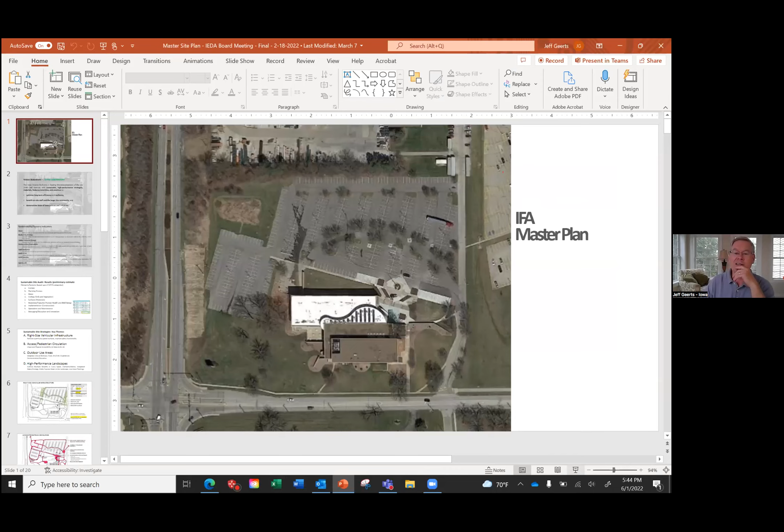And for the topic of the evening, our office for the Iowa Economic Development Authority is located in Des Moines. I'm going to share my screen now and give you an idea where we're at. This is at the corner of Bell Avenue and Fleur Drive. Gray's Lake is right up here to the north of us. This is Communications Data Services, or CDS, in the Bell Avenue Business Center just to the east. And across the corner here is the old ABI campus.

So this building, this property was purchased by the Iowa Finance Authority, I believe in 2019. So the Iowa Finance Authority is another quasi-state agency, and it's a sister agency of the Iowa Economic Development Authority. We both share Debi Durham as our director, and we both work a lot with community development types of programs, particularly federally funded programs like the State Revolving Fund and the Community Development Block Grant Program.

We also house the Iowa Insurance Division in that building also. So there's 3 agencies that reside in this complex now, and the total area is about 10 acres. And as you can see, as it sits right now, we have a pretty massive amount of parking and impermeable surfaces and a lot of turf, and a really hard to manage, very steep slope along Fleur Drive.

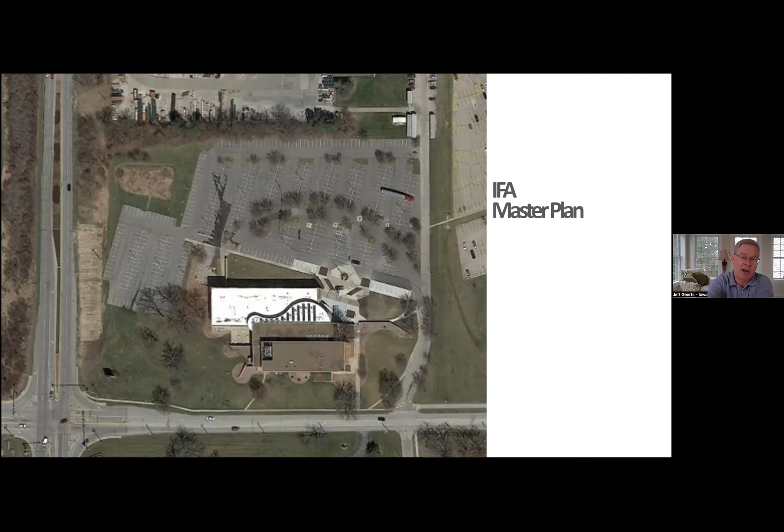So back in November, we were able to secure some financial support and partnerships with Polk County through the RAIN campaign and through the Department of Natural Resources and their non-point source or the 319 water program there, who really were interested in this concept of developing this living laboratory to showcase best practices for redeveloping an existing urban, developed site. How can we transform a site that's already been developed in an urban location and improve its overall environmental performance?

So, we are looking at how do we improve the resiliency of our site? How do we make it more efficient to operate and maintain? How do we use the site to help us in retaining and attracting staff to our agencies, as you probably hear every day? That seems to be a challenge for many people. So how can we turn that site into an amenity that can help us support the current staff and retain them and attract others in the future, and demonstrate some of our policies and initiatives?

As we started this planning process, we did get some consulting assistance. We hired BNIM out of their Des Moines office. Kevin Nordmeyer led the team and partnered with a gentleman named David Yocca, who is a living infrastructure, ecology restoration expert and landscape architect fellow. So we had a really great team between Kevin and David.

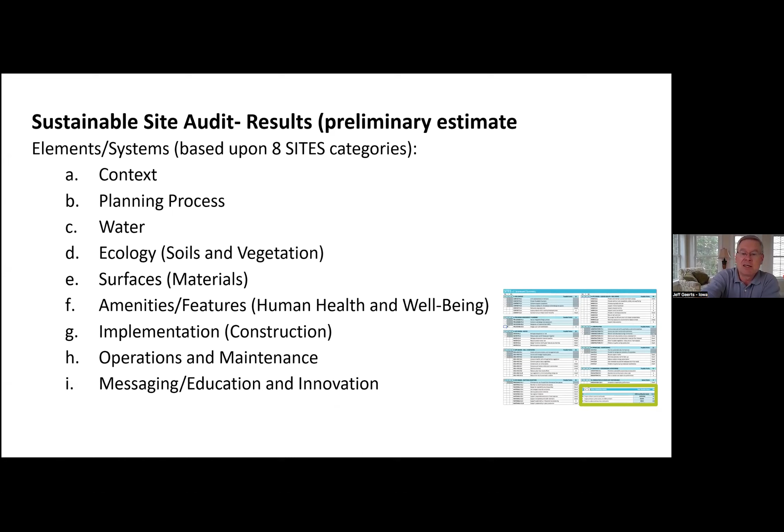And as we started meeting, we developed this plan over about a 2-month period. We had about 36 people involved, and it was very interesting. About half of those 36 were Iowa Finance Authority and Iowa Economic Development Authority employees. But we also brought in the stormwater team from the city of Des Moines. We brought in Jeremy on the sustainability side. We brought in the Parks Department. We brought in community development, planning.

We brought in Polk County and the Soil Water Conservation District, Drake University, Knapp Properties, Knapp Property Management, who manages our property, RJ Lawn and Landscape, who's our site contractor who maintains the outdoor portion of the site. The Iowa Stormwater Education Partnership was also involved. I think I mentioned Drake University as well, but we had almost equal outside expertise combined with members from within our two agencies. And in that process, we narrowed it down and developed these key themes.

How do we right size the infrastructure we currently have in place? And I'll talk more about the parking and the parking lot size here in a little bit. How do we create greater opportunities for outdoor uses on the site? How do we make better the access and the pedestrian circulation around the site? Again, encouraging more outdoor use of the site and connections to the neighborhood. And then also, how do we make our landscapes higher performing? And I'll go through each of these little pieces here.

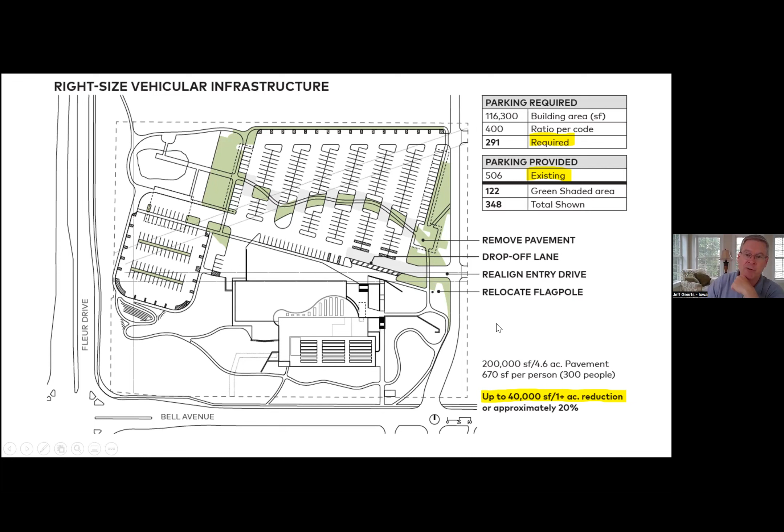We also proposed taking out some parking in here to create a little outdoor green space that you'll see in some future photos, and kind of change the circle drop-off area to just a drop-off lane. And then looked at removing some parking over here too, which I'll show you. And eventually, even with just those minor changes, we showed that we could reduce our 4.6 acres of pavement by almost an acre, or 20% of the imperviousness that we currently have.

And by doing that, it also helps create some opportunities to create these little pedestrian loops and walking paths around the site that when it added up, I think we're just a little over 3/4 of a mile if you made all of the loops. So we would be taking out the parking over here, creating a kind of a grassy swale, or we would call it a bioswale.

Yeah, somebody have a question or comment? Okay.

And part of that, next to that bioswale, that would be managing the water that's running off this parking lot before it gets over to this feature I'll show in a little bit. We'd add a little walking path as well. So we tried to create better pedestrian circulation around here. Look at some ways to improve the crossings at Fleur Drive and Bell Avenue. Improve our bus shelter, which right now does not exist. Right now it's a signpost stuck in, looks like a tire rim.

Again, just trying to make it much more attractive to use other modes of transportation, adding additional bike parking, making it closer to the front door and more accessible. We do have some indoor bike parking right now, but you have to go up a series of steps and across a loading dock and unlock 2 doors to get to it. So we're trying to make it more accessible.

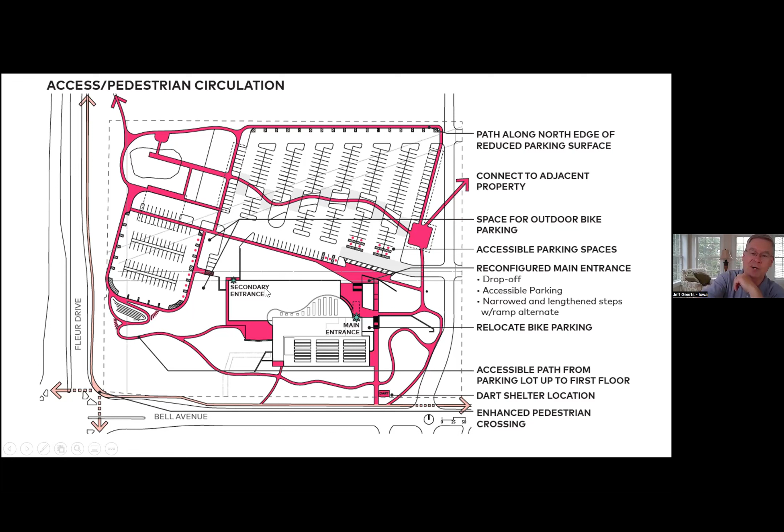Looking at the outdoor use areas, again, not only from just getting out and walking, but can we move more of our meetings outdoors, whether internal or external meetings? Can we do some sort of educational programming out there? Can we create other types of work environments that help retain and attract employees, help with social distancing interests, provide safe places to gather?

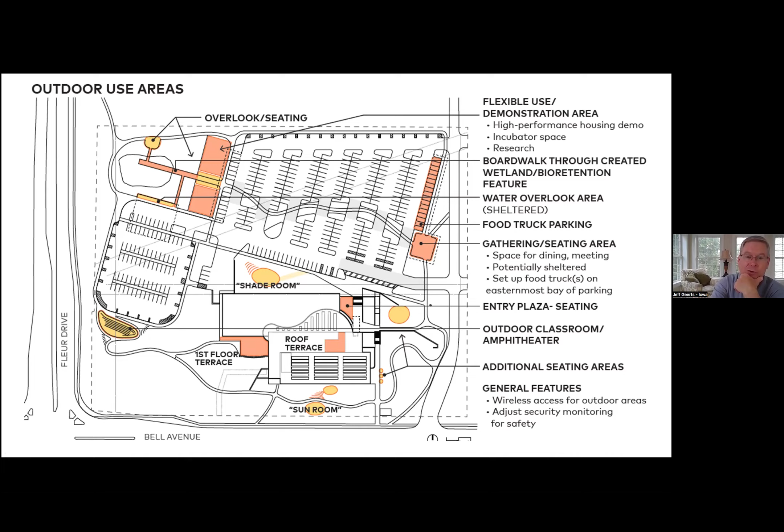What you see here is we took out the parking that was along here, and you'll see in a future image, this becomes a parking canopy with solar. That could be a place where we park food trucks in the future and charge them or power them with the solar versus the diesel generators that a lot of them use now. And right now, those trucks sit in our circle drive at the front door. So again, just trying to create a greater outdoor, more amenable space for working and play as well.

And then we also started looking at the stormwater side of things and what are the opportunities to create demonstration sites of different types of stormwater best practices. Right now, almost all of our stormwater is going into inlets in the parking lot or roof drains into storm sewer that is going to a detention basin here that's in really bad shape and very much silted in, probably with at least 1.5 feet of silt, if not more, over the last 60 years.

We have a little bit that goes off east into a storm sewer pipe here that goes out eventually, I'm going to assume goes to Gray's Lake, although there is a little drainage ditch between us and Gray's Lake, so it may actually funnel its way over to the Raccoon River. So we started looking at how can we divide and conquer that stormwater and demonstrate lots of different practices.

So we are showing here some proposals for incorporating permeable pavements, some opportunities for incorporating bioretention, which is basically rain gardens with a subdrain underneath them in case of a large rain event or the system gets clogged or for whatever reason isn't draining. Converting our raised parking islands into rain gardens as well. That bioswale that I already mentioned would be an addition where the parking spaces were at the north side.

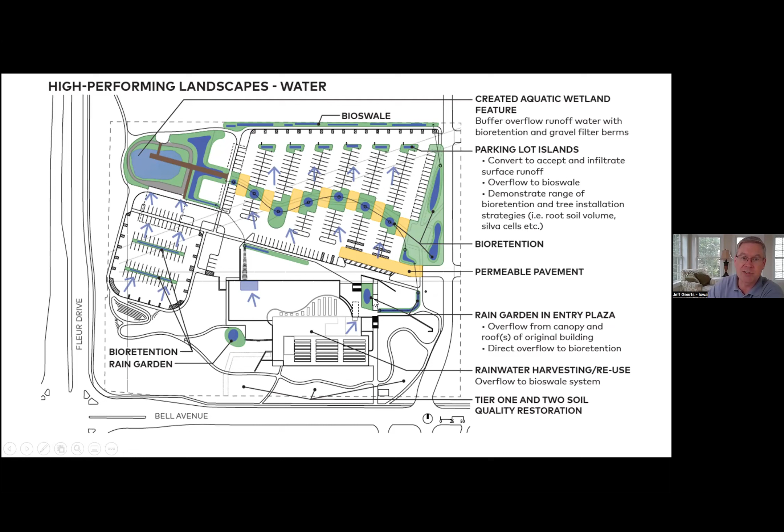Converting this detention basin into a stormwater wetland. I'll have a couple more images of that, kind of creating a little boardwalk feature within it. We look at some rainwater harvesting opportunities off of the upper roof that maybe feeds some little garden plots on the roof here, or at least green roof applications as well. And then I showed you already that little rain garden area, the entry plaza, as you come up to the front door.

Kind of building off that idea of high performing landscapes in addition to the stormwater management, really looking at the plant ecology on the site and really getting a lot more trees in there. Right now, unfortunately, if you go past our site, there are very few trees in the entire parking lot. We lost about 24 trees to the emerald ash borer, and they've come out, but nothing has gone back in yet.

We also have a couple acres at least of mowed turf right now. That takes 2.5 to 3 hours a week that RJ Lawn Landscapers are mowing those and mowing the current parking islands. So there are some proposals in our plan to convert some to pollinator gardens. I would kind of view it all as pollinator gardens because we're talking about converting turf areas to restored prairie.

We've already started that. We've already started prairie restoration on the south side of the building this spring. If you go by now, you'll see kind of an area that's been killed off and has some good plants and some not so good plants coming up. And then we also have it flagged out and are getting ready to take out about another, I think, 1/3 of an acre yet this year.

Oops. Oh, I didn't know I could do that right in that space. This will also become prairie here over the next couple of years, and eventually we'll move over to here as well. And then we want to do the same thing along Fleur Drive. And hopefully we'll do that in tandem with the state's integrated roadside vegetation management program. But before we can do that, the city of Des Moines needs to adopt an integrated roadside vegetation management plan with DOT, which I think they're going to work on over the next year.

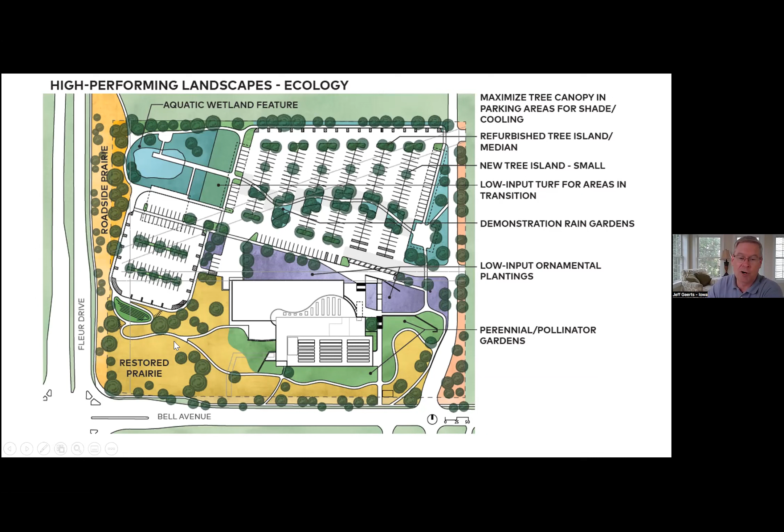Let's see what else can I show you. So adding some additional tree islands in here, but just a lot of trying to get more shade, more tree cover onto the site, and less turf and more natives onto the site as well. And then we also looked at our rooftops. We kind of have an interesting opportunity with our rooftops here. We have 4 rooftops: second, third, and fourth floor, then the upper floor.

This space up here actually has kind of a break room. And then most of it is the mechanical systems, but that break room actually has a rooftop patio access up here on the third floor. So we have opportunities to do maybe demonstrations of 3 different types of green roof systems, one on this roof, one on this roof, and one on this roof, and leave this roof as kind of a control comparison roof. And this fourth roof is also showing the potential for a solar array installation to show the benefits of installing solar over a cooler green roof than over a hot roof. So,

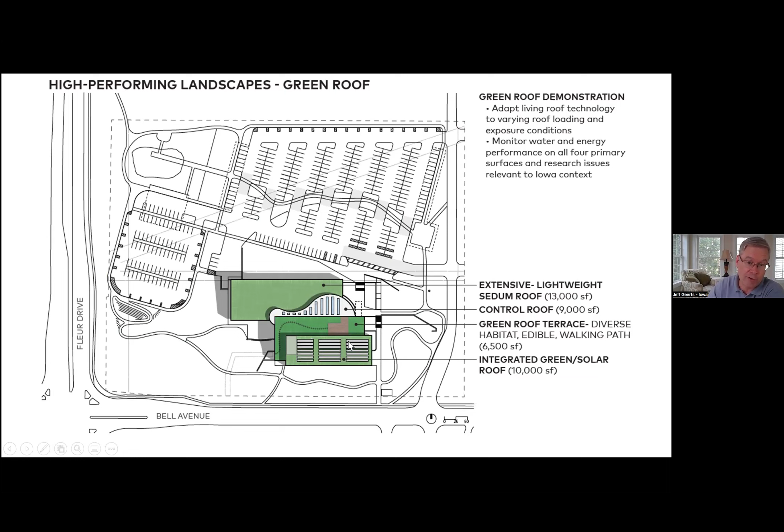and then speaking of solar, we also identified some other opportunities to incorporate solar into the site. And we could also do solar on these other roofs too, but for the purposes of the plan, what was suggested is solar on the upper roof over a green vegetated roof, a solar canopy over here that shades this row of parking and creates kind of a shaded outdoor space that all becomes green space. In the original area I showed, there's actually parking right there too, and there's also parking over here as well. We also propose a solar canopy over here and one over here as well, with this potentially being kind of a little overlook area too for this stormwater wetland.

And either this area or this area potentially being places we could park the state vehicles. Right now they're over here, they're unsheltered. And as more vehicles go to electric, you know, having the opportunity to charge those electric vehicles there, and there. Right now we have a charging station in front of the building here for 2 vehicles, but we know we're going to need more than that very soon.

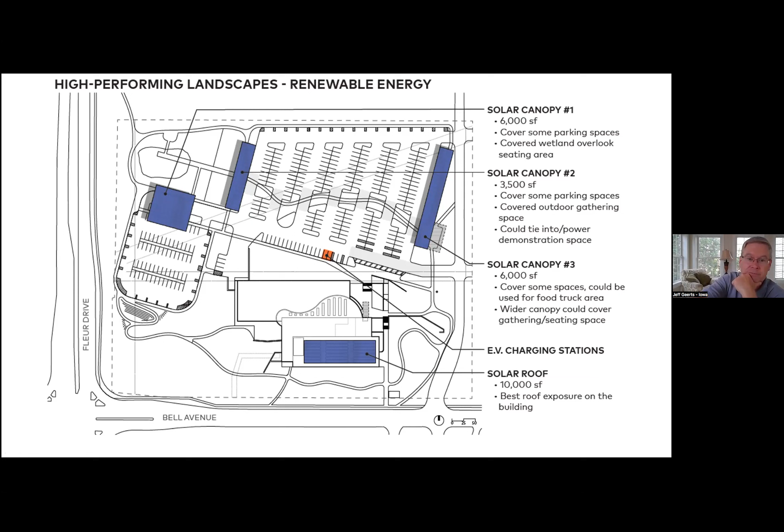Map Properties is currently out getting bids from contractors or engineers and design firms to redesign the front entrance piece of it. So hopefully you'll see a lot going on with the native vegetation this year, and then probably this front entrance being reconfigured next year. And then if the city has their integrated roadside vegetation management plan on file with DOT within a year from now, we probably will go to the Iowa DOT with an application for some funding, hopefully to tackle this piece along Fleur Drive.

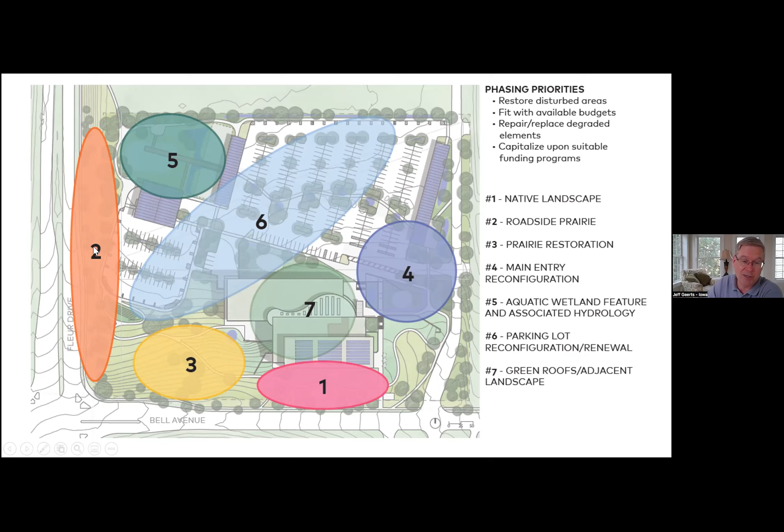It's so steep right now, you can't maintain it. I've walked up it. You basically have to walk on all 4s to get up there. So it's really hard to maintain. And we would really want to convert it to something that's easier, long-term, lower maintenance, and more attractive. So that's kind of a phase-in plan.

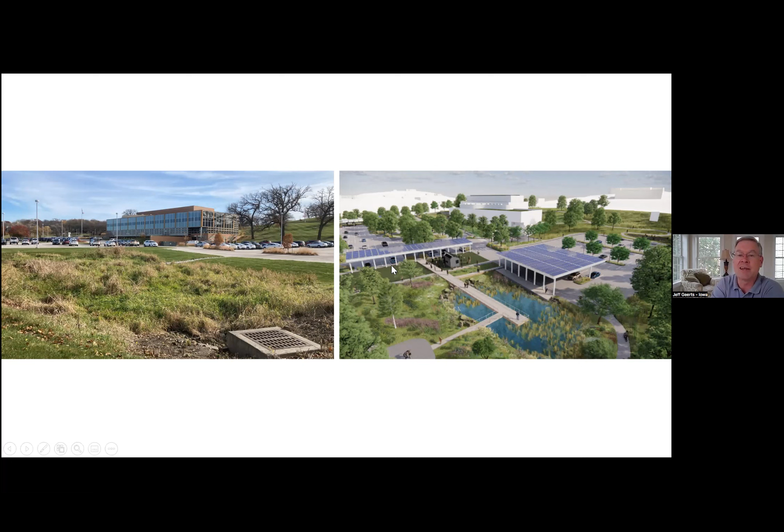So eventually you get to something that looks more like that. Or here's an image from the southwest at the base of the hill along Fleur Drive, looking over our not so attractive detention basin and our parking lot and existing building as it currently is. And this would be the vision if we implemented the concepts as shown that I just shared with you.

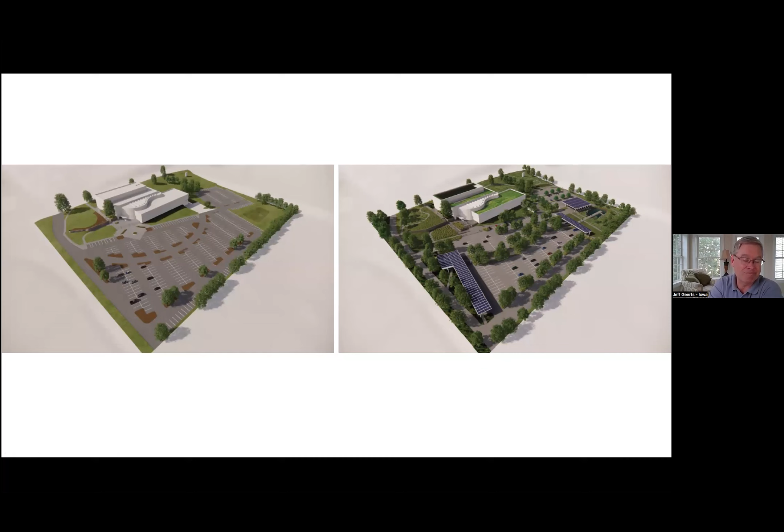So it'd be going from something that looks like this today to hopefully looking like this, and really demonstrating all those things we just talked about: the habitat restoration, the native plantings, the stormwater management, the alternative energy, reduction of impervious surfaces, creating more outdoor gatherings, working spaces, just getting more interaction with the site itself, reducing the heat island effect, all those kind of good things that we're trying to achieve.

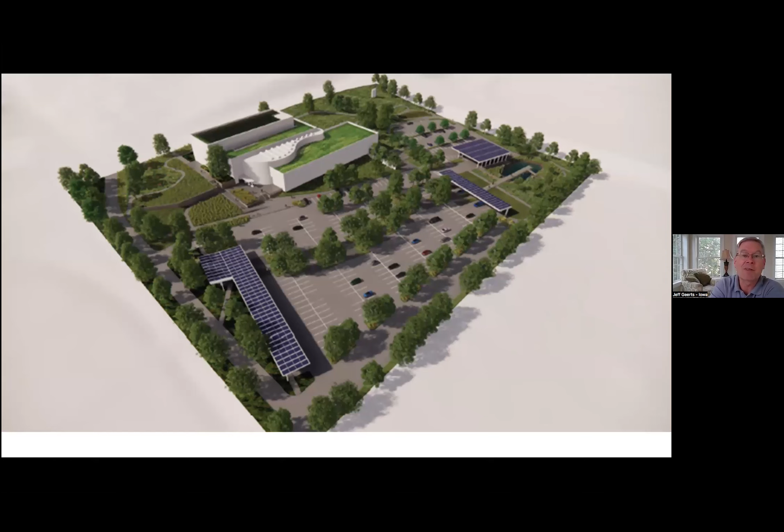So there's one more, a little more close up of the vision. So we're basically trying to go from what you see on the left to that. And I've got a couple slides in here, just kind of fun things that I might as well show since I know they're in here. There's a group of universities led by Georgia Tech, I believe, that has been developing reuse opportunities for spent wind turbine blades. If you Google Re-Wind, I think it's the Re-Wind design catalog, you can see the various designs they've come up with for very specific types of wind turbine blades of varying sizes.

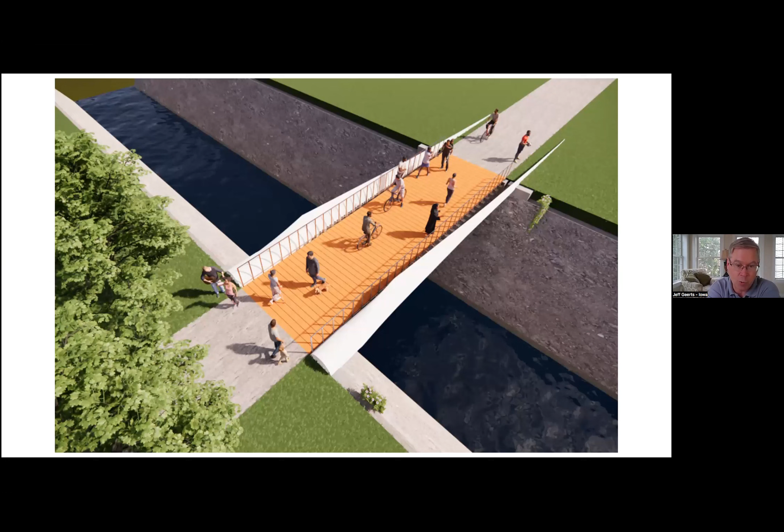And over here, in what would become a stormwater wetland feature, we were showing examples of little boardwalks or bridges into the wetland itself. And that's where you could see maybe something like this being a use of some old wind turbines in Iowa that are no longer being utilized for whatever reason. So that's what I have. We can go back to some of those if anybody's got questions or comments or thoughts.

I have a question. I'm on the stormwater mitigation, flood mitigation committee for the city. And the city, of course, is putting way over 100 million into gray infrastructure, and also doing a good job of trying to figure out green infrastructure. Just wondering if you have any research on the percent of flood mitigation that doesn't go down into the sewer or the retention basin, how effective, because Philadelphia, their city plan is mainly green infrastructure.

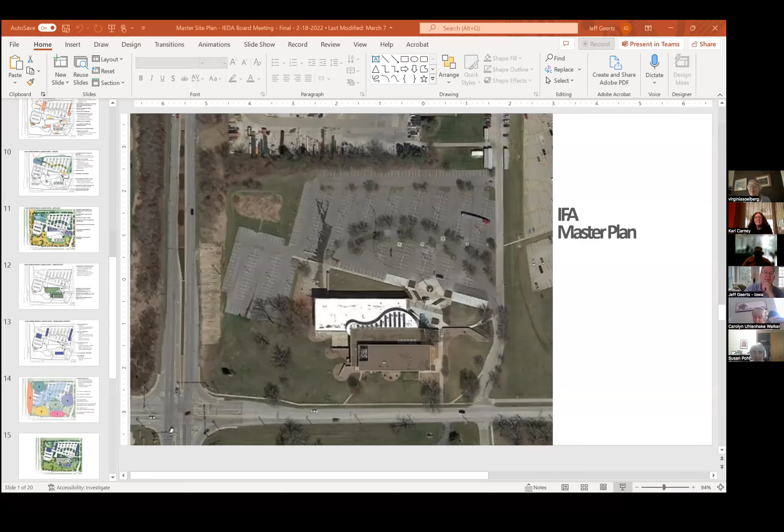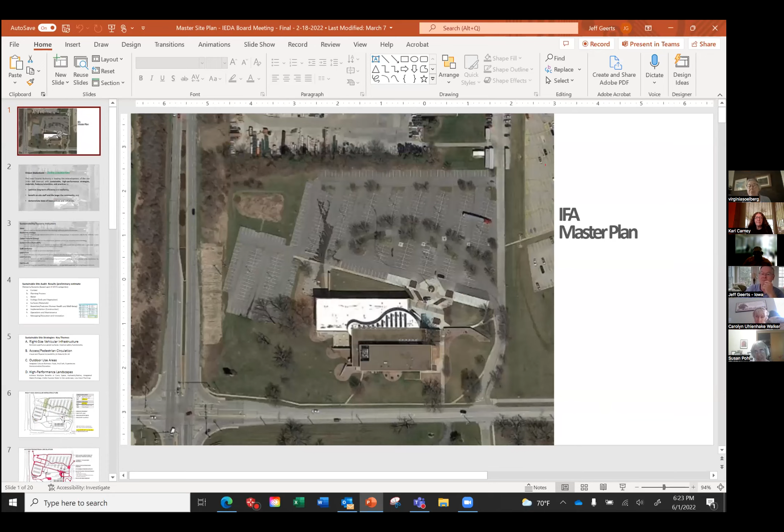I think I'll add, our public works director last week, when we were talking about the opportunity to do that vegetation management plan for that area of the site, also mentioned that they did do a tree inventory and only identified really one tree in that area that they think is one that we need to be concerned about. Yeah, it's probably somewhere in here. There's more trees along here, but our property ends about right there.

And then this is our property line, our north property line is right behind this curb, just a couple of feet, runs across here. And then it's city right-of-way, kind of on the upper part of the slope and all of the slope down here. And then our neighbor has this piece of it. But maybe I misunderstood you, Ginger. Our detention basin, or what we're showing as the stormwater wetland, in this image right now, it looks like this.

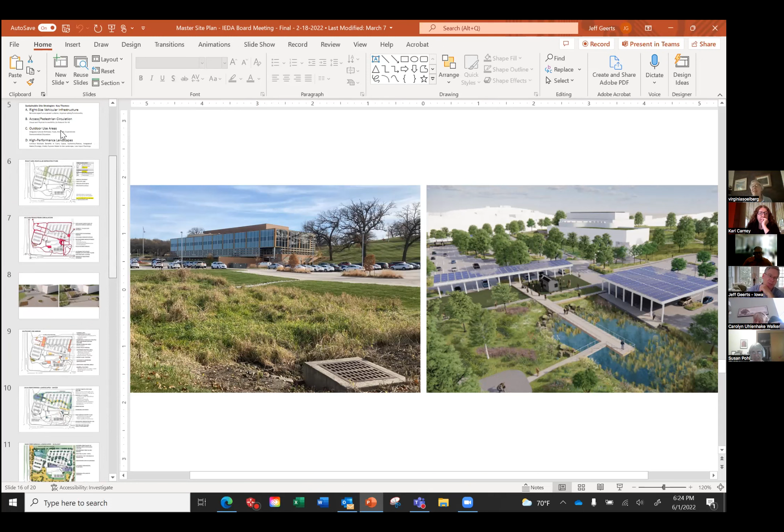Yeah. Now, I wasn't speaking about your project as much as I have seen it locally in other places where they're doing that. Yeah. Well, in some cases, yeah, that was something I've learned over the years too. That always surprised me because I always thought having the trees along the stream corridors was a good thing, but apparently in some cases not a good thing, and they contribute to stream bank erosion and so forth.

So in a lot of the stream bank stabilization work that happens, they seem to remove the trees to try to get a better ratio of slope to protect that stream bank and even create little flood benches for flooding and kind of reconnect in some cases to the floodway. But there are some other cases where trees go, and I'm very, very upset and sad to see that happen. I probably know what I'm talking about.

I'm wondering, you showed the slide that talked about kind of how the project was being phased in. Do you have an estimate of when you're expecting all the different pieces to be completed? And then B, is there any concern? It seems like a lot of times projects propose green roofs, and the green roofs are always the last thing to be completed, and they're always the first thing to get cut because of budget cuts. So wondering if there's any concern for that.

Always. It seems like the green roof projects that get proposed, and many of the projects we fund outside our agency, seem to be one of the first things to go because they are an expensive upfront cost. Although in the right situations, they can provide some energy efficiency benefits to a building. They obviously provide stormwater benefits, and they also can make the roof last longer.

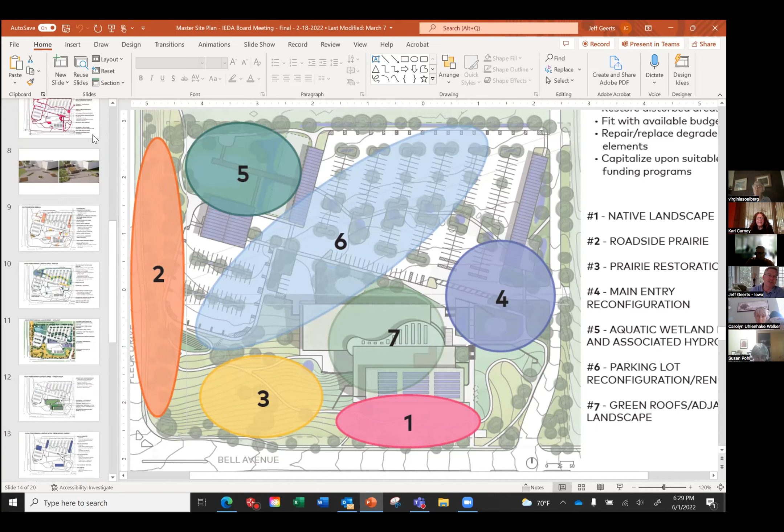So timeframe, I don't know, I'll say 10 years, but I hope it's less than that. The other thing to keep in mind here is that just to the east of us, it's partly showing on here, the Bell Avenue Business Center is now owned by Kraus or Kraus Group or Kraus Plus, part of the Kraus family. So they've got those, whatever it is, like 40 acres over here. And in the south of Grays Lake Masterplan, there's lots of redevelopment shown here too. So there may be some opportunities as that redevelopment happens that we can kind of partner together. There's redevelopment shown north of us as well.

So maybe there's a way to collaborate and partner all of that stuff, and maybe economies of scale could help us do some things that maybe we wouldn't be able to do, or maybe do them more quickly. But I think this redevelopment's probably at least 10 years down the road too, probably after the soccer stadium district or whatever it's called gets tackled first. Jeff, as a living lab, will this be shown to developers, to corporations, to big business, as well as, of course, city staff, just to show what can be done?

No, definitely. That was our whole idea and our pitch to Department of Natural Resources and why they helped fund the development of this plan. We envision site tours, field days as things are being constructed and as they're installed, having some sort of informative website, having signage around the site explaining to people what they're seeing. You could have little classes there. We've actually developed a couple of large meeting rooms in here, so we could envision working with the Iowa Stormwater Education Partnership and doing classes and maybe even hands-on installation types of trainings with different practices on the site, training some of our staff as docents to lead tours.

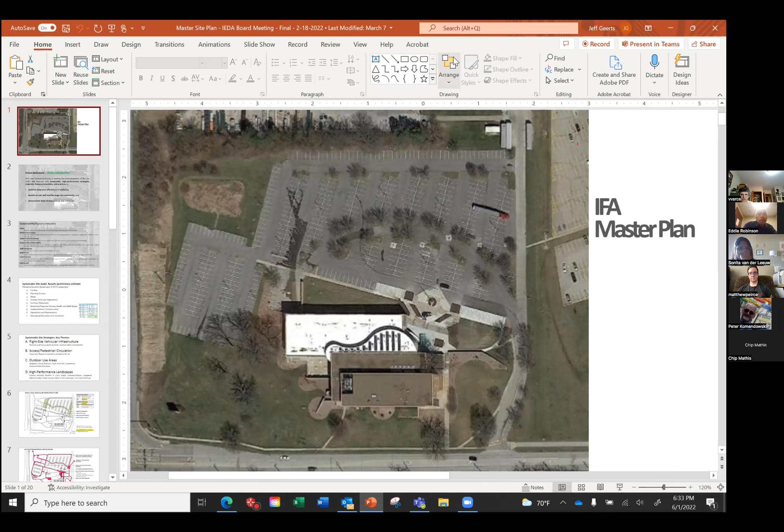What other questions do we have for Jeff? Just unmute yourself and don't be shy. Lots of good information here. Thank you. Yeah, thanks for the opportunity. Keep an eye on it and see how it progresses along. If you have any questions, feel free to contact me. I'd be happy to talk more about it. If you see opportunities for partnerships to help bring the vision to reality, I'm definitely interested in those as well.

Yeah, and I know 1000 Friends of Iowa is going to be looking forward to a Best Development Award nomination in the future. I hope so too. That would be great. Sounds good. We like field trips. Yeah, me too. Okay, very good. Anything else? Good to know. Jeff, thank you so much. This was great. Oh, did Eddie have something there? How might I contact you?